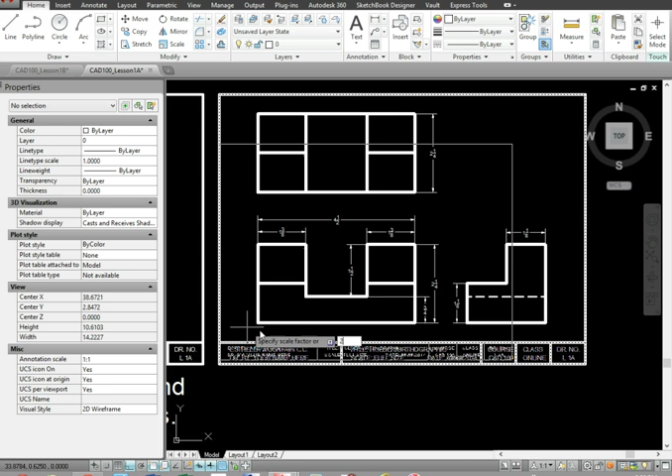You can't see the pop-up menu, but just type in 2, and the scale factor, as you can see, is active, and hit enter. Now our title block is scaled twice as large, and we have more space up here for us to do our drawings.

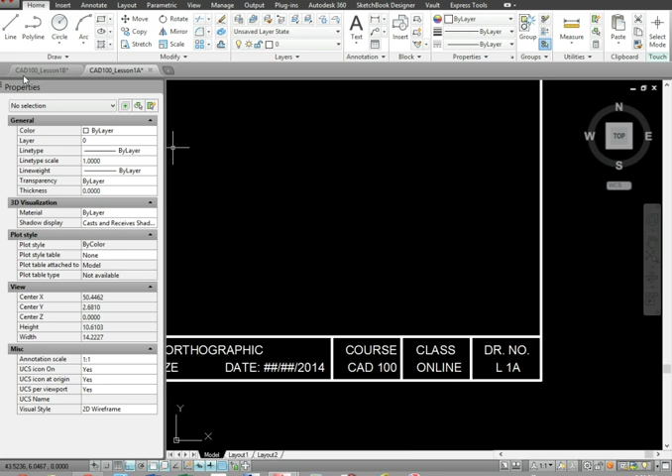Update your title block, the date, and everything else, and it'll look like this. Holder isometric, and this will be Lesson1B. These lines will be removed.

And we're going to draw the isometric for this drawing, and I need to explain why you see so many dimensions on here based on what the original drawing was. When you're drawing an isometric, you need more information, so it's easy to add dimensions for all the little details that you'll need to be drawing later on. All these little line lengths that you see throughout.

Do a file save as and rename the file Lesson1B. Lesson1B is the isometric. Lesson1A is the orthographic. Now that you have saved your work, we can begin. The first thing you need to do is change your drawing settings to draw from orthographic to isometric. To do that, we're going to use some toggle buttons down here.

One of the toggle buttons is called Grid Display. For Grid Display, I want you to right click and choose Settings. Switch to Isometric Snap, and now we're going to be drawing isometrically. Click OK, and look at your cursor. It has changed its orientation. Do this after you have dimensioned your object.

We're going to keep ortho mode on. We're not going to use polar. Object snap modes we're going to need are the following: endpoint, midpoint, intersection, and perpendicular. Activate those. Click OK.

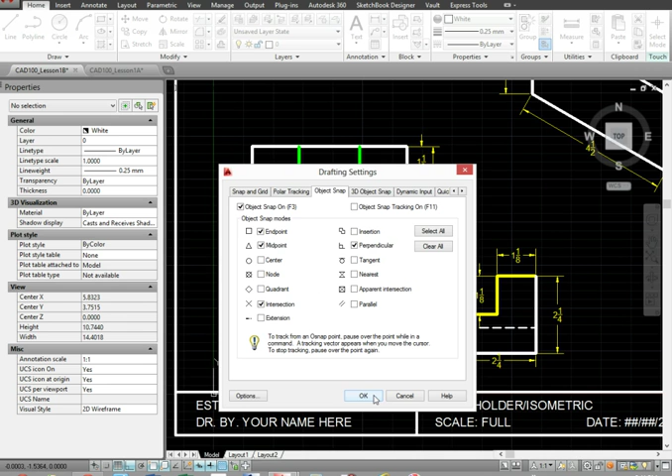This cursor that you see can be changed by using the function keys on your keyboard. The function 5 key, or F5. As you're moving your mouse slowly, hit F5 and you'll see the cursor change directions in 3 ways. That's intended to help you draw an isometric. The F5 key.

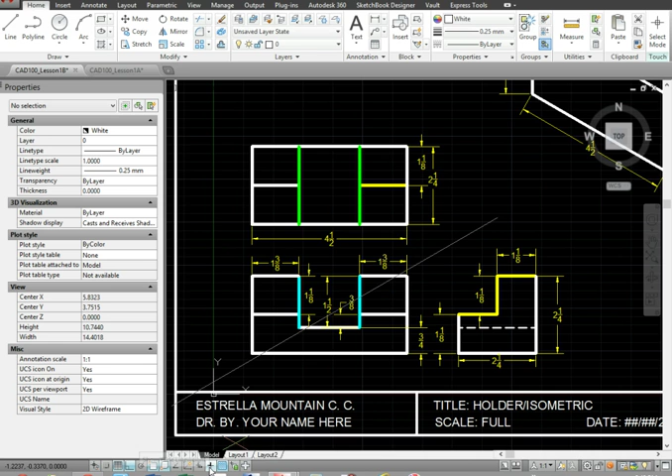As a quick review, this right here is your dynamic input. That's the information you see as you're drawing. If you take it off, when you draw lines, you will not see any information. This of course controls your line weights, and we're going to leave them on.

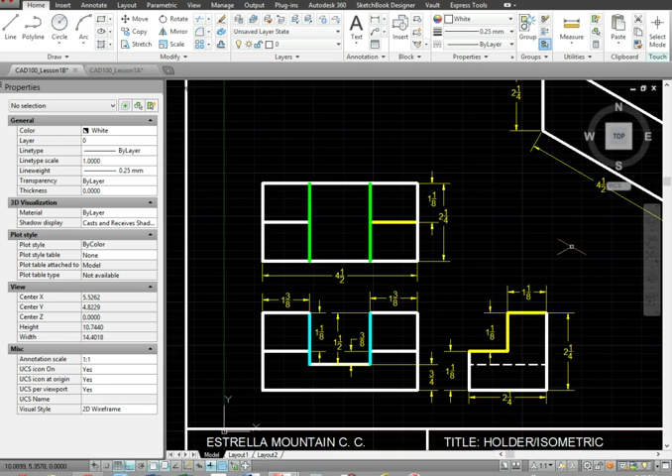I've already drawn a part of the box, and this is the process in which you draw. You have to draw the object according to its width, height, and depth. The width is 4.5, the height is 2 1/4, and the depth is 2 1/4. You draw this as a box first, and you're going to work from here. You're going to be using ortho, line command, and the function 5 key to rotate your cursor as you draw in different directions.

I measured these 3 to show you the relationship between. The colors are referring to features in the video you're about to see. This is going to be drawn in steps. The first step is to draw the box. The second step is to draw features from the top view, which are in yellow here, which you see right here. Well, I'm not going to get everything yellow, but you get the idea.

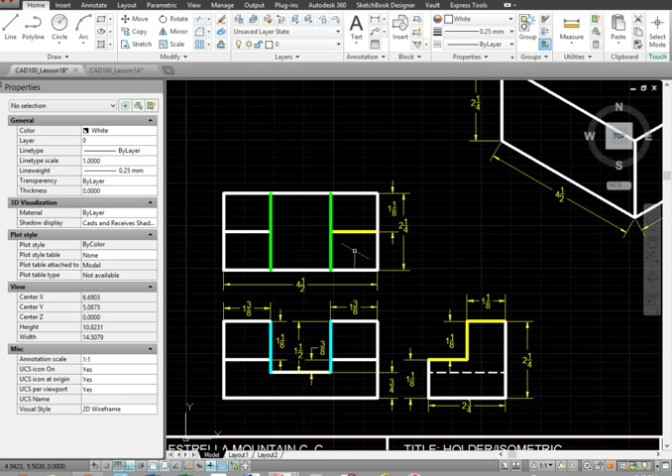The next step is to draw any lines that are going down, which happens to be measured from the front view and the side view, 1 1/8, 1 1/2. The next step is to draw lines in these directions. And finally, you add the little details that you see here, that the 3/8 is measured on the front view of the block.

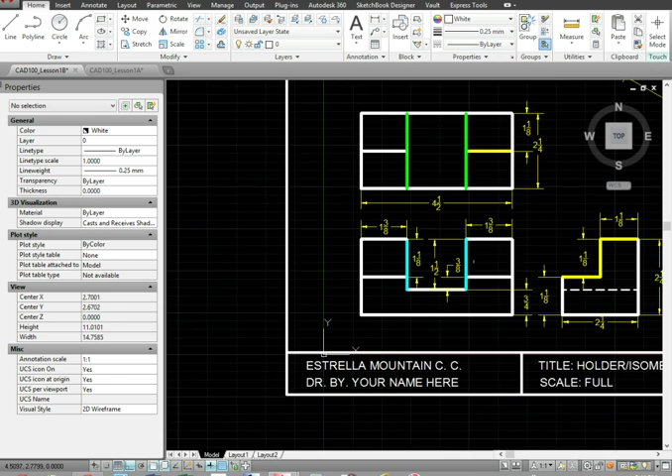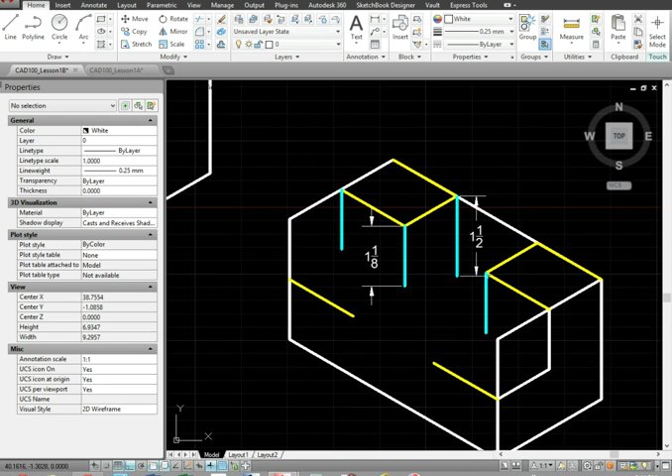So I could leave this to you to draw, and I'll review again the steps. Draw a box. Draw the details from the top view with ortho on, drawing lines. Draw vertical lines. I'm using color, you don't need to, of course. Draw more horizontal lines. I would have to change the function 5 key in this direction to do that, and the F5 key in this direction to do that.

And finally, here's a tip to get lines like this, or to use the trim command to simplify drawing with isometrics. Let me back up a few steps to demonstrate what I mean. With the line command on, I need to draw lines going this way. Sometimes I can snap easily, like you see here. Sometimes I could just point, and this is going to be 2 1/4 to get the distance I need.

Or sometimes I could draw it longer than I need to, and just use the trim command to remove the part of the lines I don't need, as you see there. For example, in this area here, those are overlapping. I'll just use the trim command to remove what I don't need.

Another one has to do with here, getting this yellow line. Starting from here, I would use the line command. I can see I'm going in the wrong direction, so I'll hit the F5 key, point in this direction, go past the blue line, and then use the trim command. Hit enter, of course, and pick what I don't want.

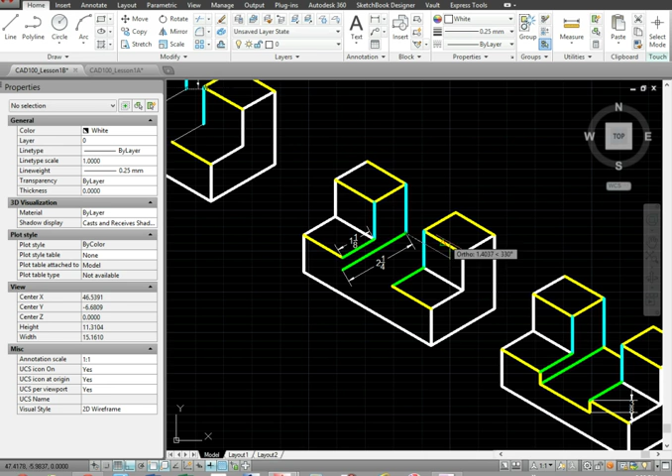When you're drawing lines that are overlapping other lines in isometrics, sometimes your object snaps will be on. See that? And you'll pick them by mistake, and it's going to drive you crazy. So as you draw lines, zoom in so that you're not touching anything with your cursor as you click. That'll help you avoid snapping to lines you didn't intend to, as I demonstrated there.